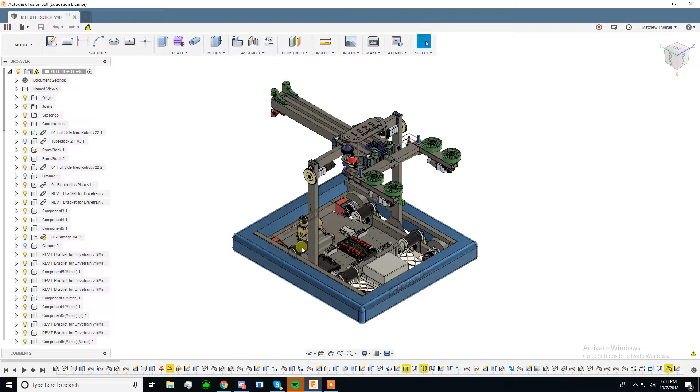My name is Matthew Thomas. I was the driver for Adequate V2 at NTX.

This is an update video for NTX, which was on the 7th of October 2018. This was competition day. This is where everything happened.

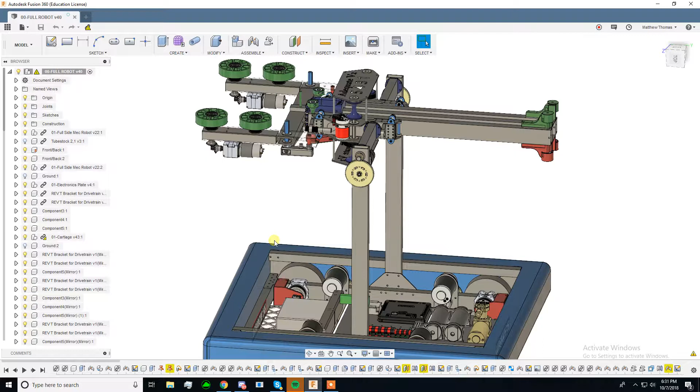Just a quick review: we seeded third. After qualifications, we lost one or two matches, I think. I know one of them is a surrogate that we lost, so I'm not sure how many we lost. But our robot did much, much better than we thought it would do.

We were doing really well in the field, and then we made it through quarterfinals pretty easily. Then in semifinals, we had a lot of issues with our robot disconnecting, and the refs disconnecting the robot for us. I'm not gonna say that's why we lost, but it could be a reason.

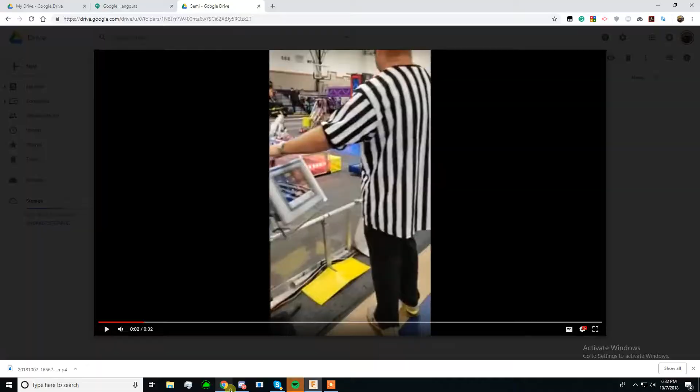Okay, so we have videos from all these matches. The first thing I did was rewatch all the matches, and I'll just say what I think, which is that we are actually a really good scale bot.

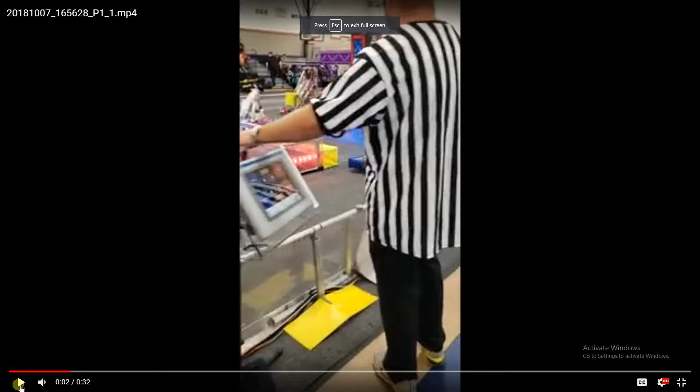So I'm just gonna play this short clip, which I singled out. But here, let's just watch. It begins, robots are flying around. That's really loud, let me mute it. Okay.

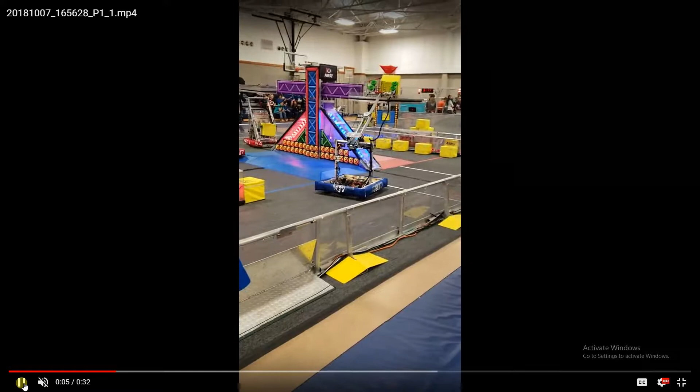The first cube that we usually do in any match is to the scale. That's just because we can usually do the scale really fast. I think this exemplifies that we just do that, and boom, it's on. That was 5 seconds from the start of the match and we already have a cube in the scale. It's really hard for teams to match that speed.

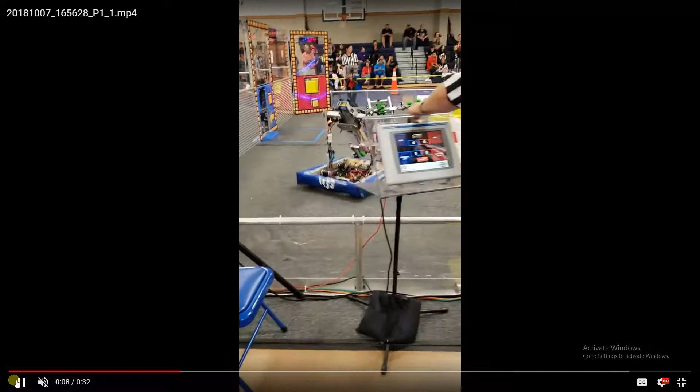Especially with, oh my god, just rewatch this sequence again. The drifting here is absolutely amazing. Drift. Okay, so yeah, we'll just continue watching this video.

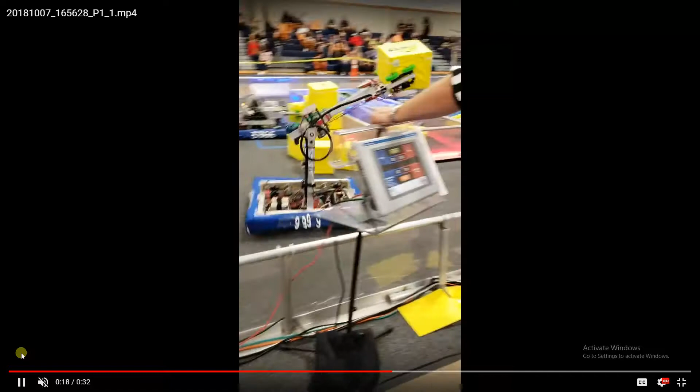It's not very long, but then we noticed that, I guess we didn't do it in this match, but our general strategy is that we are really good switch and vault bot, and we are reliable at those. At scale, our elevator is not reliable enough to go to full extension 100% of the time, so we usually don't like to do that. We only do it if we have to, essentially.

So, I guess in this match, this actually made us lose a lot of time: blocks kept getting stuck in our robot because we dropped the cubes. I think if I singled out any one very specific problem, that would be it, that we drop cubes a lot.

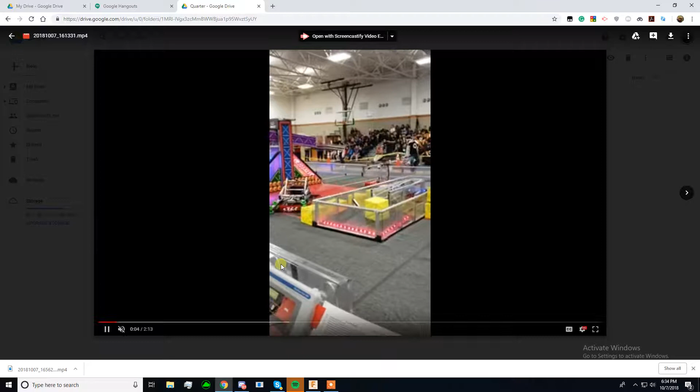Let's go watch this match. Very similar to how the previous match started, except that this cube did not stay on the scale. It went off because of something called inertia, which, damn you, inertia.

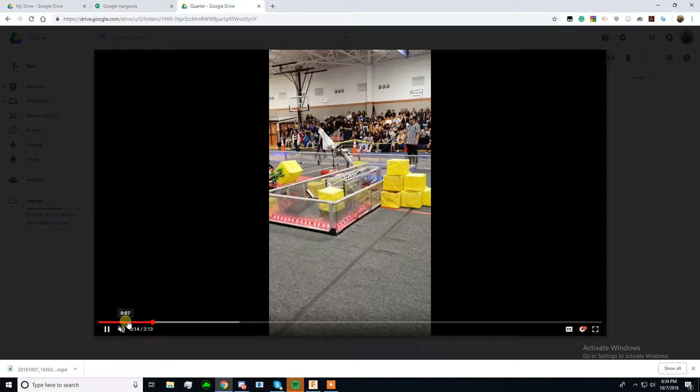Okay, yeah, you see, boom, we intaked it, then we dropped it, we intake it again. We're gonna try it again, and I think we're gonna miss it because, oh, and we dropped it again. You see, that was literally the one problem we had during the entire thing, is that we kept dropping cubes.

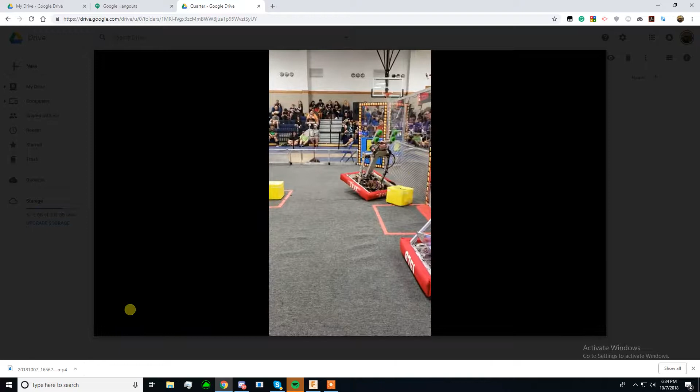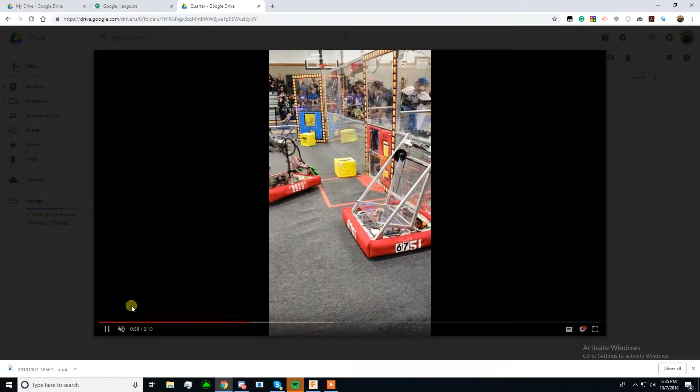It sucked. But then here, we were, Jack, why are you moving the arm up? Okay, so we basically realized we're a very, very good vault bot. See, boom, boom, push in, collect, kind of. Our intake was terrible. Yeah, the single worst part of the robot was the intake.

But when it did work, it worked pretty well. But when it didn't work, yeah, pretty well. But we had a good routine going here with just getting cubes in the vault.

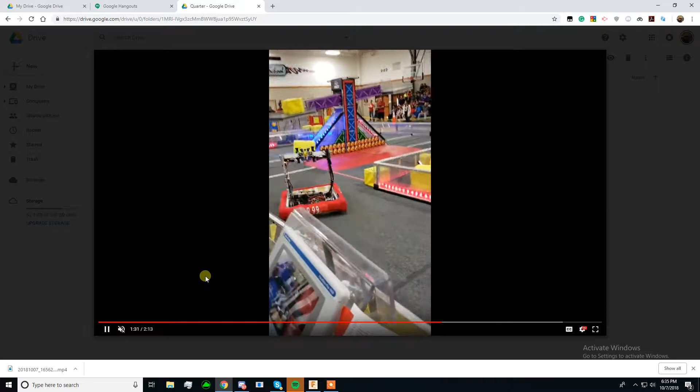I like how we get across the field so fast. That's pretty amazing. Like here, boom, I didn't turn enough, and I don't think Jack knew that I wasn't ready to deposit yet.

Here we were just like, okay, we don't have time. There's no point, we already own that switch. We have a bot going. Oh, the drift is so beautiful.

I'm not even sure what we're doing here, but for most of the matches, to be honest, we did everything really well except for the scale. During the last few matches, like in finals, we did the scale really well too.

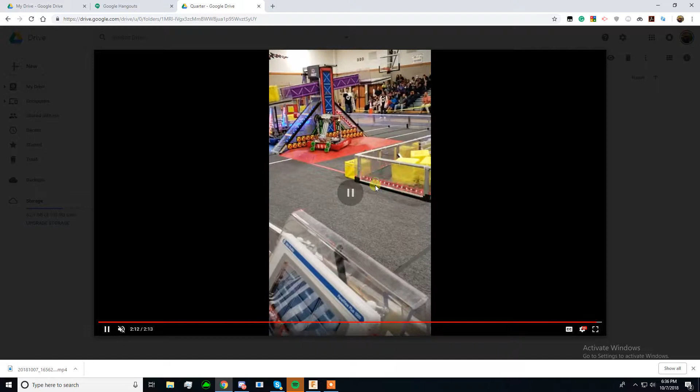Let me see, I don't even know what I'm talking about now. But yeah, the Adequate V2 drive team, and I think everyone who worked on Adequate is very pleased with how it ended up performing.

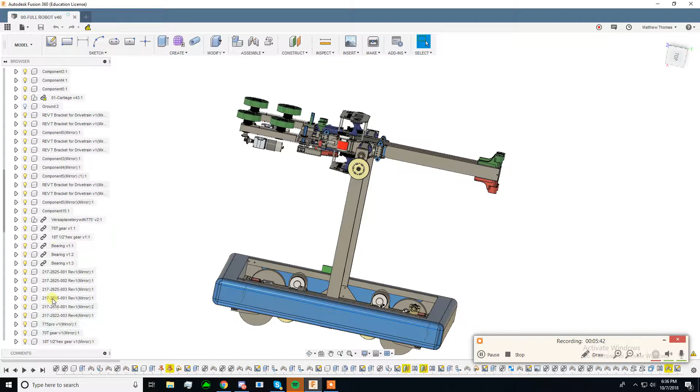I'm going to critique the design of Adequate a bit and say that the drivetrain is amazing. That's pretty funny, I said I was going to critique it, then said the drivetrain is amazing. But okay, drivetrain is amazing. This bearing system we have here, a lot of teams do it. I think that's really good too.

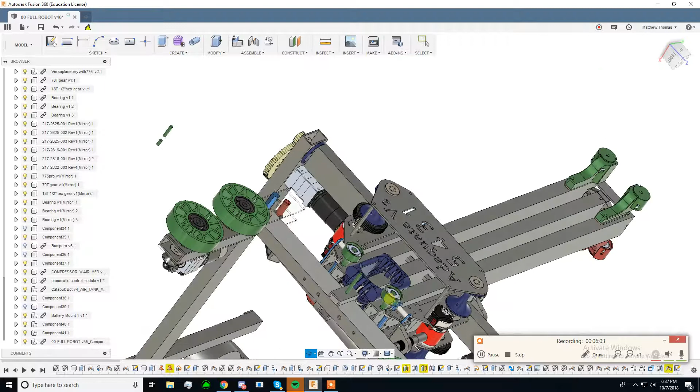Everything else is trash and needs improvement. Like this arm, why gears are terrible. We should have used chain here so we can tension it extremely well, because gears have slop in them, but chain doesn't. Can't use belt there because it's too high torque.

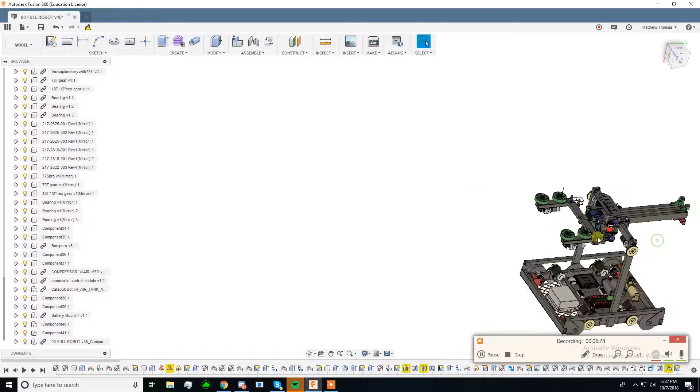Stringing for the elevator actually worked pretty well during the finals matches. Once we had it tuned, it was a-okay, we didn't need to mess with it. After we had the string in that we bought yesterday, it was a-okay, we didn't really need to mess with it.

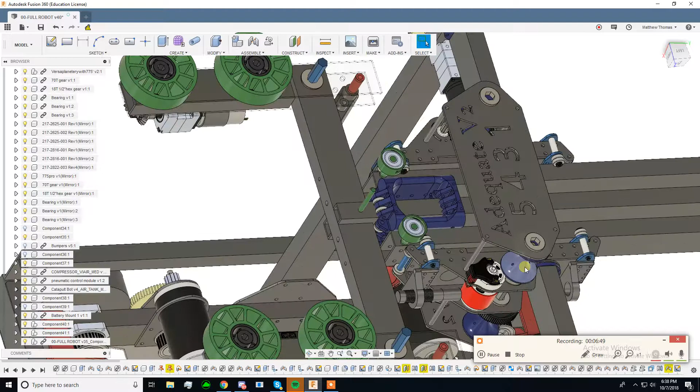I would probably have simplified it a little bit. I'm not sure exactly how I would fix that, because the problem is that you need to put an elevator on an arm, which is difficult.

Maybe do what Spectrum did with the bunch of chain, but theirs was only one stage. We kind of want two stage, so it would have been a pain. See how chain and pain there rhymed.

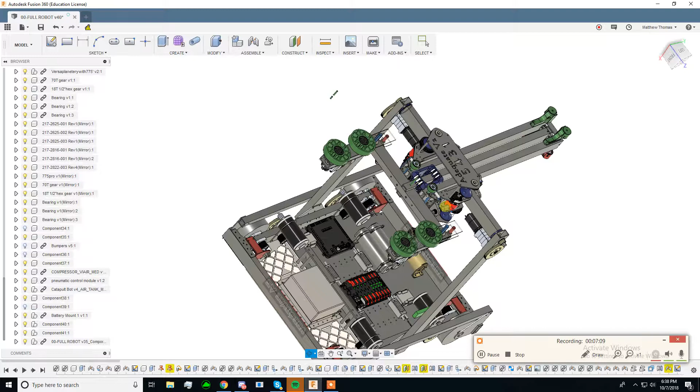Whatever, the intake is absolute trash. I think a good off-season project would be to make a really good intake for this robot, or at least put the pistons on to see if that makes the intake better.

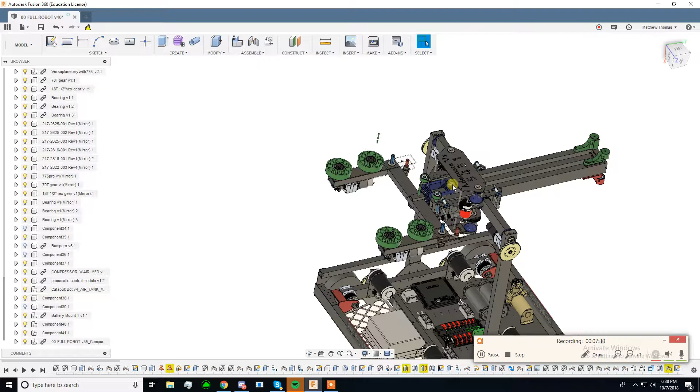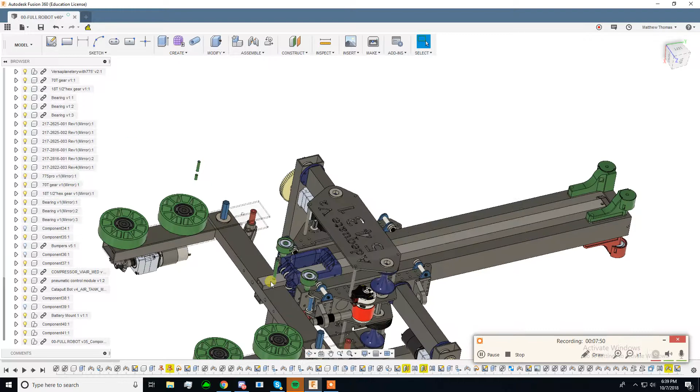What other critiques? What I loved is that all the 3D printed stuff held up like it was supposed to. This middle carriage piece, we broke it during our practice at the academy, so we knew that, and the problem wasn't the 3D print, it was the design. It sucked, so I made the design better, and we printed it, and it looks like it's had no problems.

You guys might want to say that these pulleys broke, but they were made to break. Maybe I shouldn't have made them to break, but I was expecting them to because I never thought the 3D printed stuff would hold up so well.

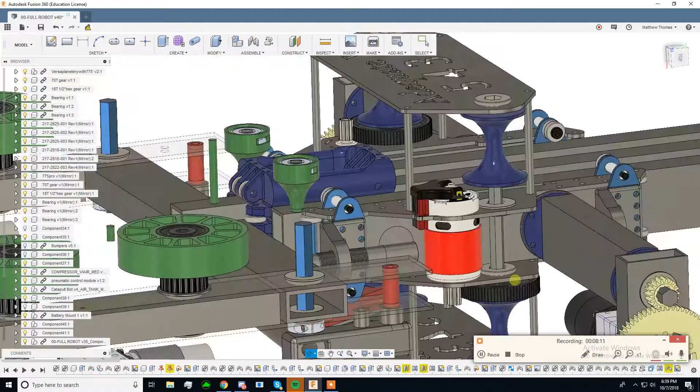Let's see, what other stuff broke? The intake was pretty much indestructible, I think. We rammed into the wall a bunch, it didn't break, stuff like that.

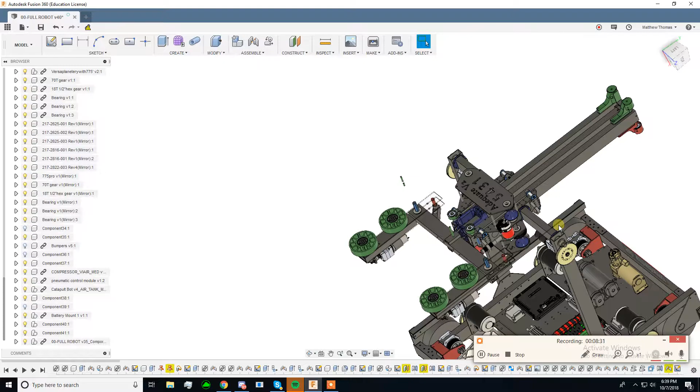But yeah, the robot performed well, we are very pleased with the direction it's going in. I think this drivetrain is a keeper. It's very fast, very agile. It's hard to play.

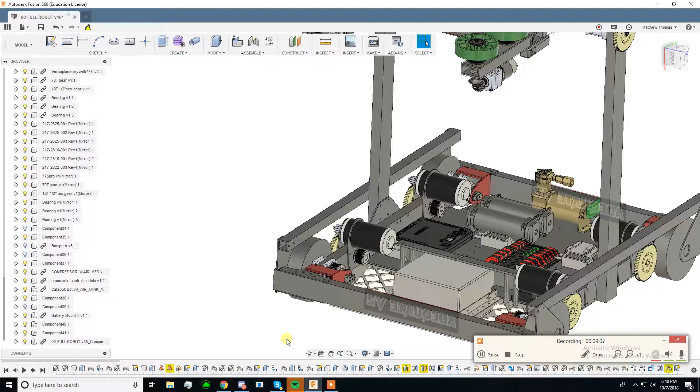I'm not sure how NTX is a good representation of competition, but we didn't really have many people play defense on us, so we can't really say anything about that. Maybe we should have Ophidium play defense on Adequate just to see if that works or not. Even Adequate was able to play defense on Spectrum and a few other teams pretty well.

I absolutely love this drivetrain. It never broke during competition, it's been super reliable, it's simple, it's lightweight. I think it's a keeper.

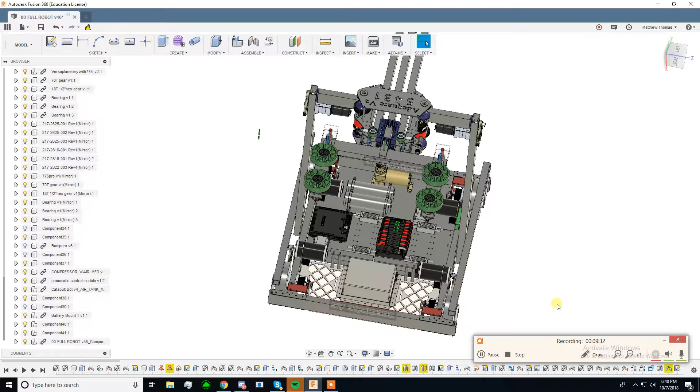I'm running out of time, but yeah, we got third place in qualifications. We made it to semifinals, and a robot was disconnecting, and our alliance wasn't as good as the alliance we were versing, which is number two. I think that was the Spectrum alliance.

I'm gonna talk about the robot at the end of playoffs, but the robot was really good at everything at the end of competition. That's all the time I have, goodbye.